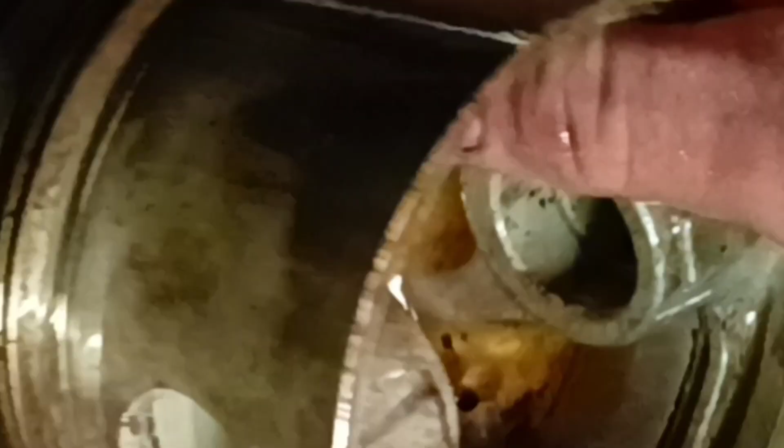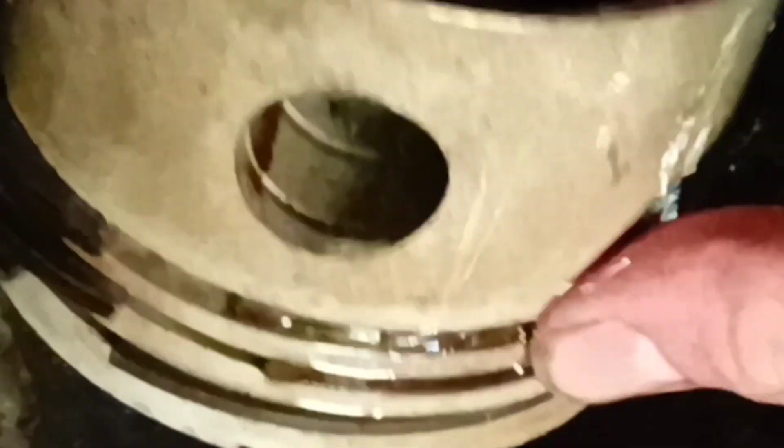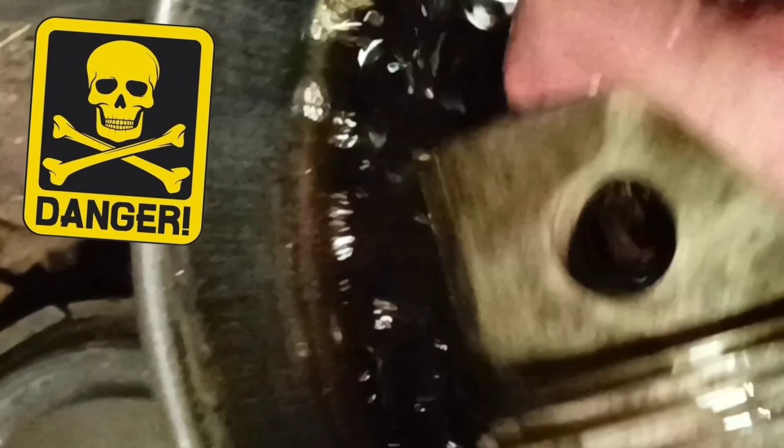I stored them at the bottom of this bucket with diesel fuel because these pistons were a little rusty when I bought them. Now we need to take out the pistons and check condition. Looks normal, I think, just superficial rust. Not any sense to store pistons in diesel fuel, but I bought them with a good discount, and these pistons had rust. Of course, diesel fuel is very dangerous for my skin. Pistons now look not so ugly.

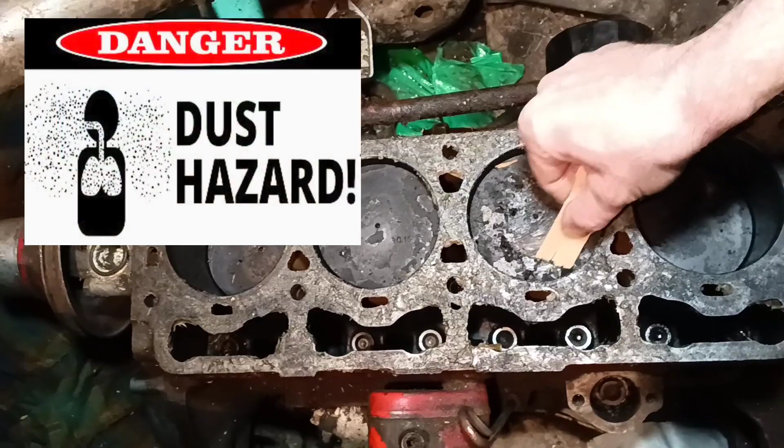Now let's look at the engine, clean it a little. Pistons very dirty, of course. This engine was rebuilt, we see oversized pistons, first repair. First repair pistons, you see a number on these pistons.

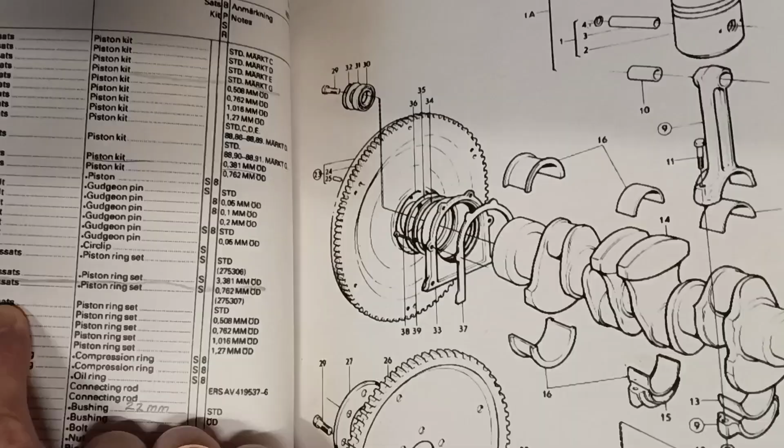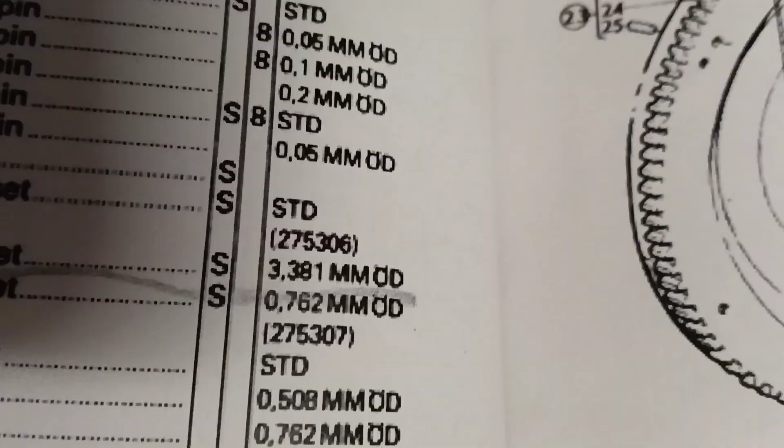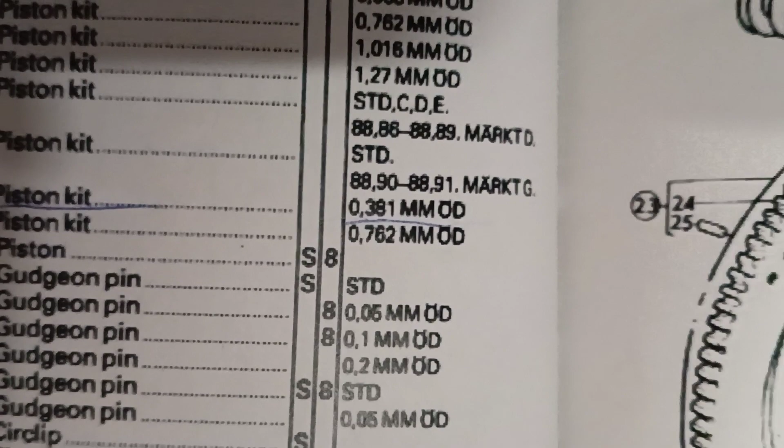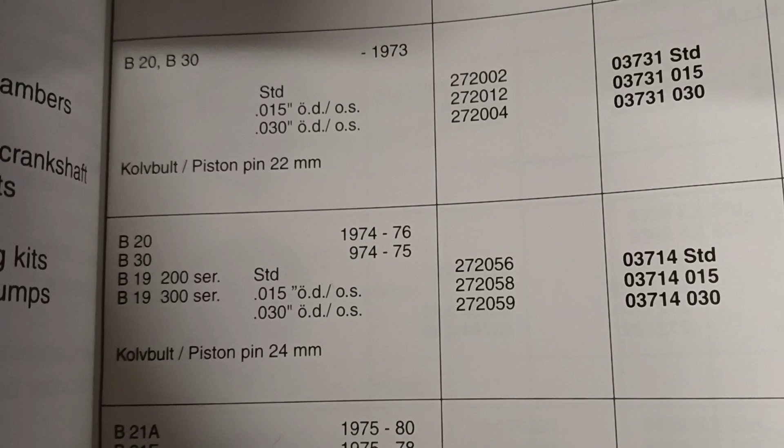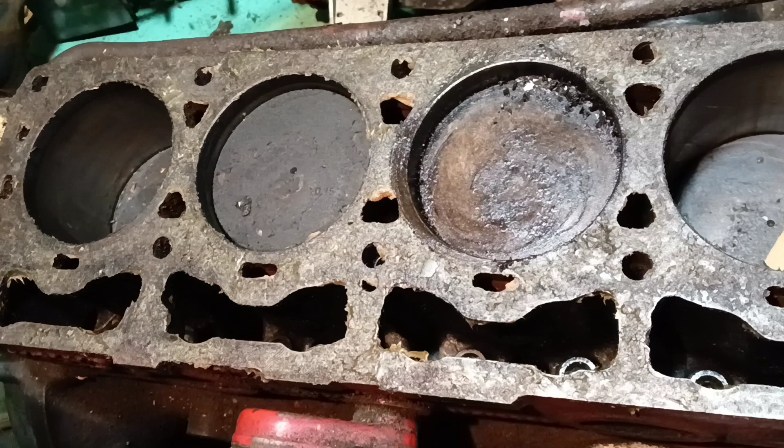Here in another catalog we see inch sizes, for earlier models that were in the Volvo Amazon and 140 series, and late models for the Volvo 240 series. Different pins because I bought oversized pistons for first repair, which can only be used for Volvo Amazon and Volvo 140 series, not for Volvo 240 series. Late models of the B20 engine had metric crankshaft sizes, which were used in the 240 series. It's no wonder the 240 series Volvo was metric.

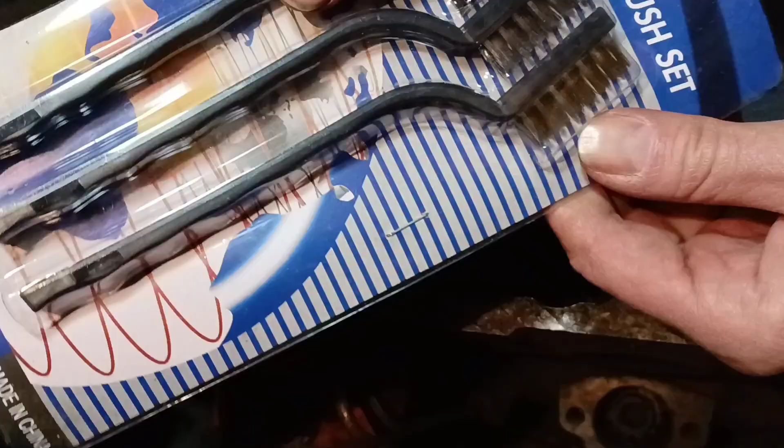I bought this brush set for cleaning pistons, three different brushes for cleaning. I bought this brush set online, but I have to say I bought them earlier also.

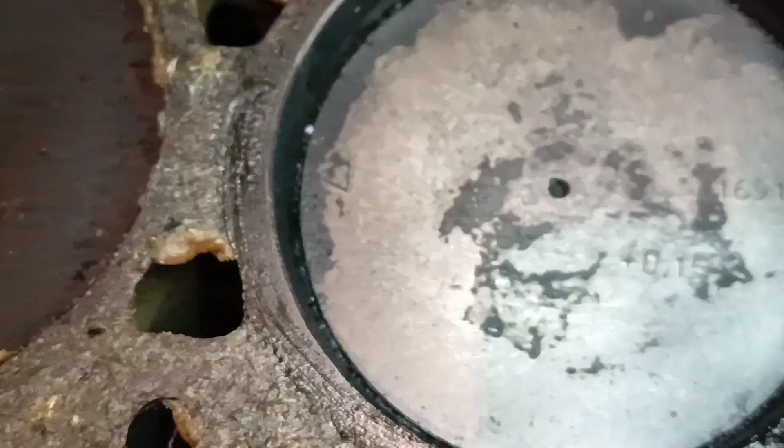When we cleaned this oversized piston, we can see the designation. I checked the valve head from this engine and each valve was leaking. I checked the valves with kerosene. Now we clearly see the designation. These oversized pistons can be used again when we make sure, of course, that they're in good condition. A lot of dirt, oil deposit, valve leaks - 100% that valve leaks.

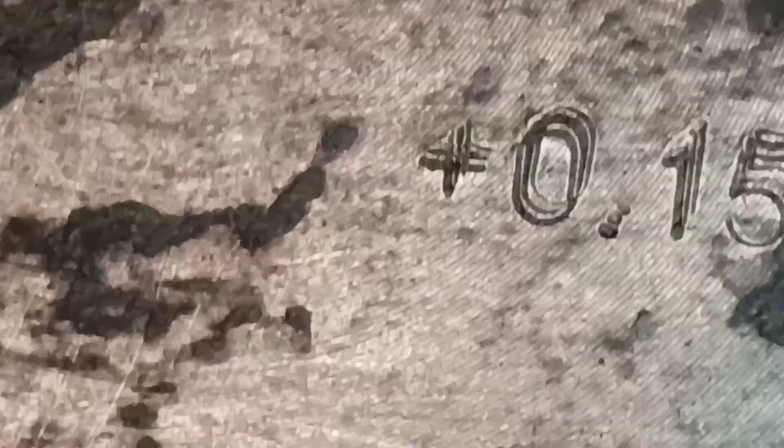Here we see oversized in millimeters. These pistons are for earlier B20. Here we see them without cleaning. Piston rings need to be changed anyway - when we repair the engine, we need to replace the rings. This same engine, the Volvo B20, was used in late Amazons.

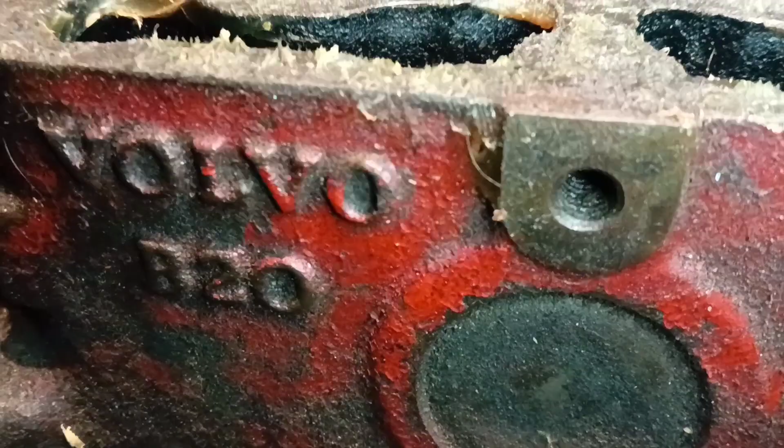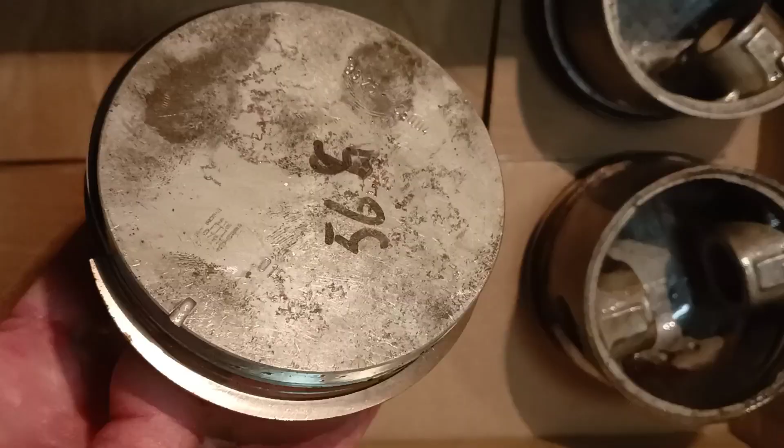Let's look at my pistons, which I bought with a good discount. They sat a lot of time, and we see rust, just superficial rust I hope, in the rings only. Should be washed from diesel fuel because I stored them in diesel fuel.

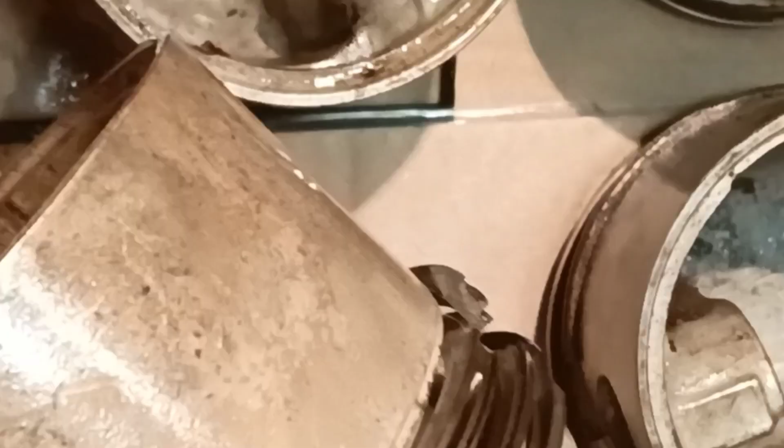So you're not taking as big a gamble as you might think, because I bought all stock pistons for my Volvo 140 series. And the pins are not so good, unfortunately. Cardboard boxes not so good looking, obviously the roof was leaking where they stored it. But as I said earlier, I bought them with a good discount.

I'm really pleasantly surprised by the high quality of these pistons. Maybe it sounds like an excuse, but I have to say that I now have a big wad of hundreds in my pocket. Just superficial rust.

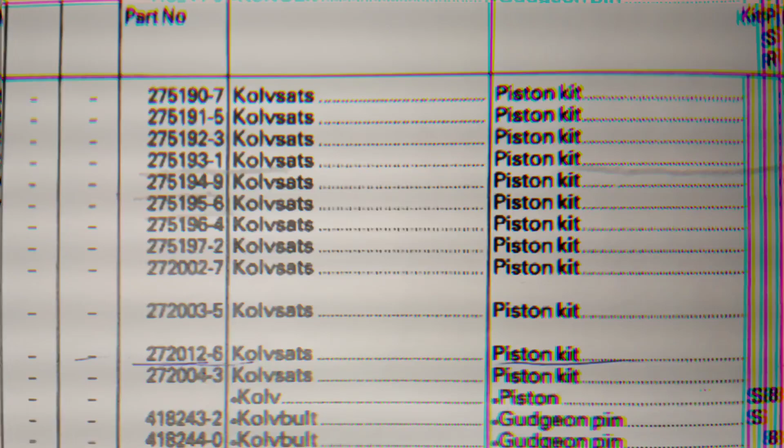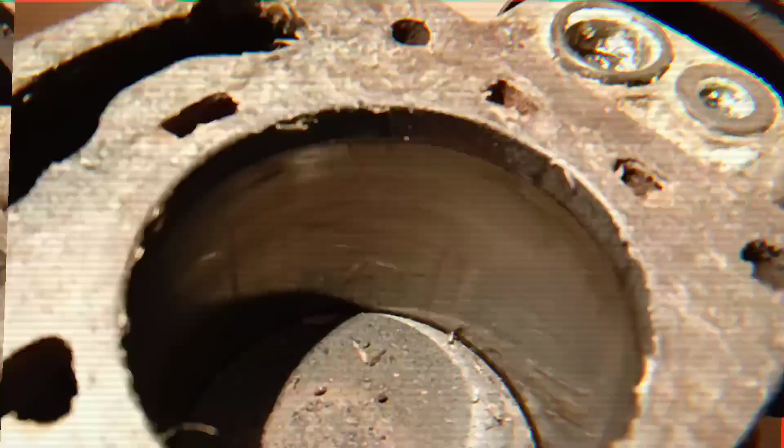Here we see standard diameter plus oversize, and we are able to get the size designated on the box. If we have an engine with 4 cylinders, we need 2 boxes. If we have a 6-cylinder engine, we need 3 boxes with pistons. These old ones are rock solid. These things are really well designed and built in Sweden. This Volvo B20 engine is actually done in Sweden, where they do it right.

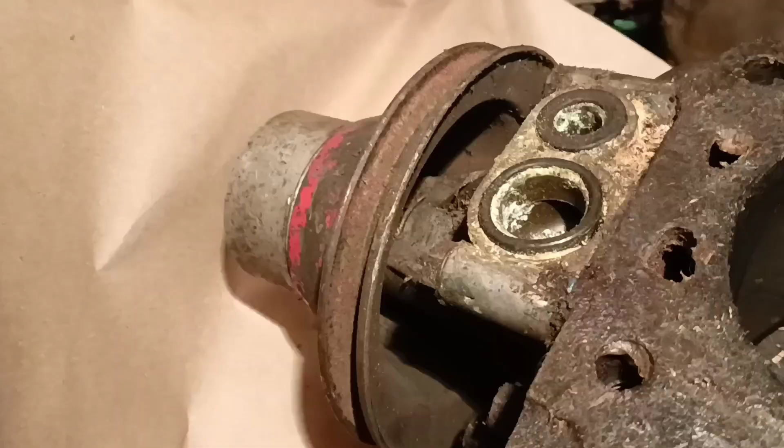I also recently bought engine heads, and they also need to be cleaned. Here the inlet valve diameter is 44. We know that the valve diameters differ on the Volvo B20 engines. Valve stem seals can be interchangeable from a lot of different models.

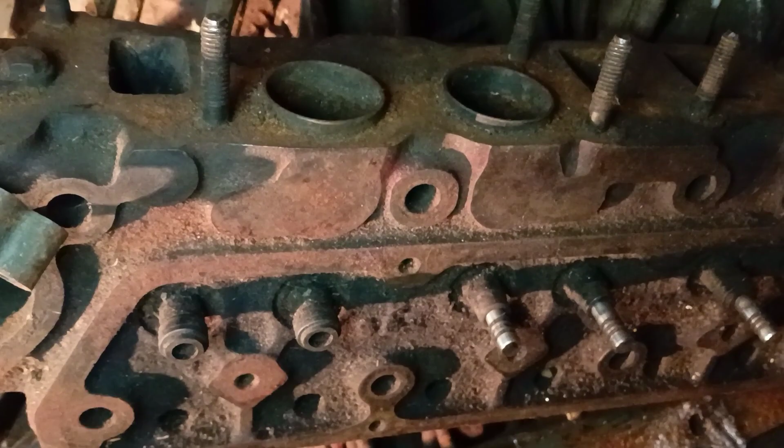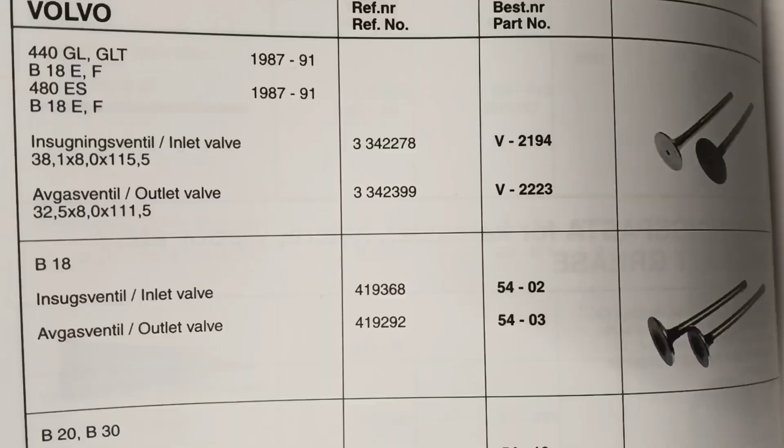And on the valve stem we can see its original number. If we look closely enough, we see 419766. What does it mean? Let's look at the catalog and see what this valve number means. This means Volvo B20 engine, 44 millimeter inlet valve. What's interesting is we can use this valve from the 6-cylinder engine.

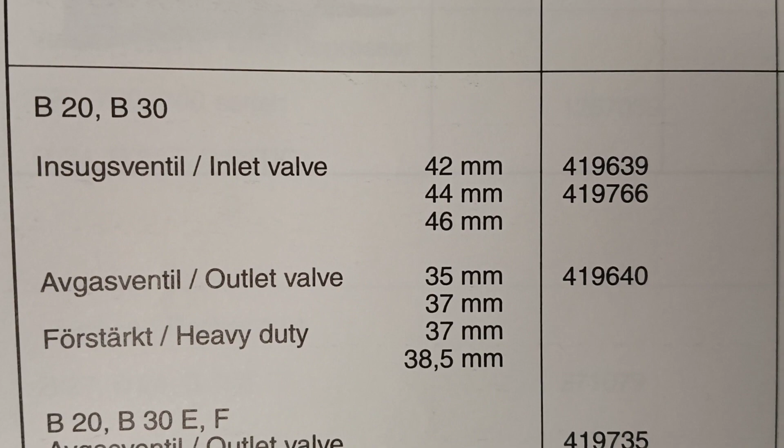B18 numbers, and valve stem seals also need to be replaced. Valve seats are not so damaged. This head is without valve seats that can break and fall, which I find amazing nowadays considering unleaded modern gasoline. But I use additives for fuel, and there are more substitutes now on the internet.

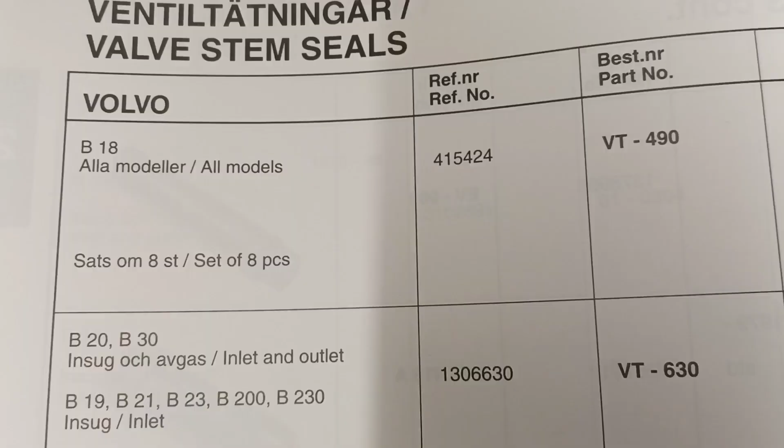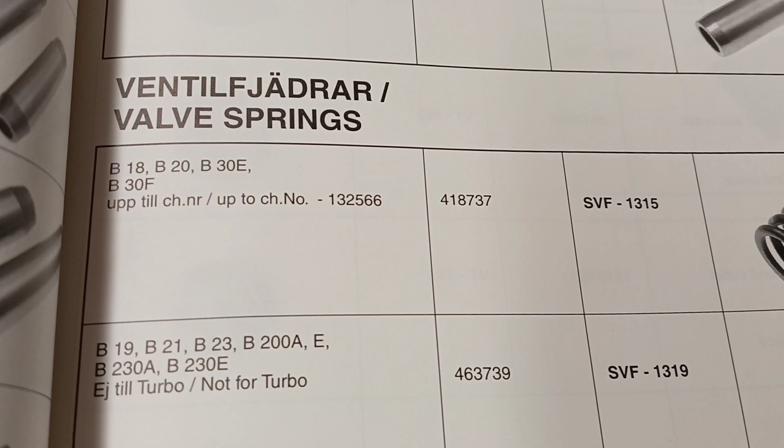Valve stem seals, also a lot of substitutes for the B20 engine. Valve keeper is interchangeable from another car. Valve springs maybe not for replacing. Valve guides. Here is an adapter for the oil pressure sender - through a copper pipe, oil pressure goes to the oil pressure gauge.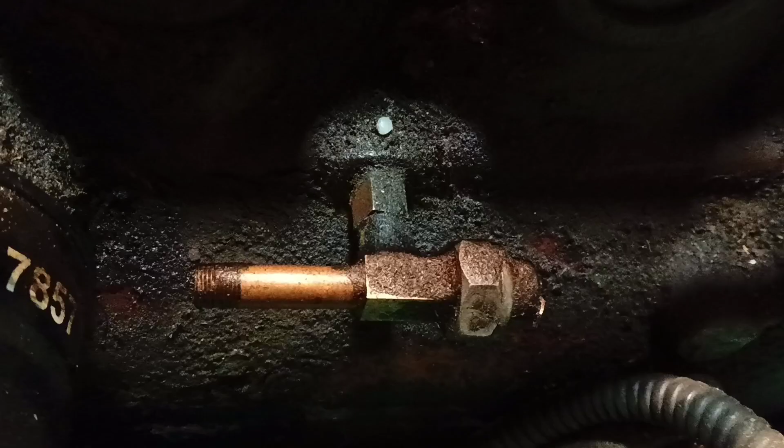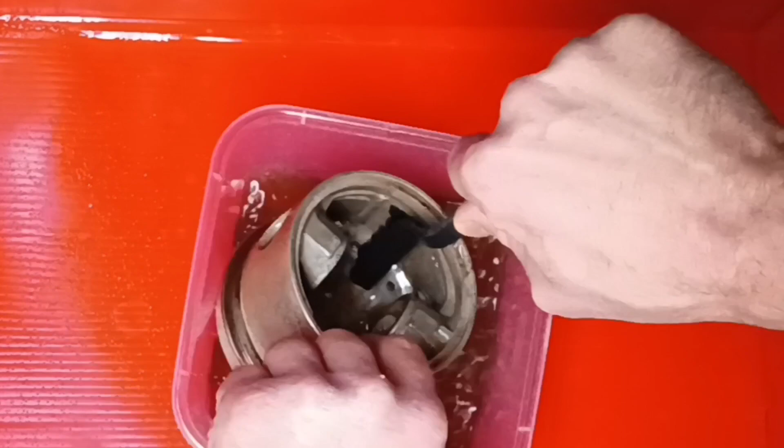And I need to clean the pistons again in gasoline now. MAHLE KOLBEN use high quality piston rings - they don't burn oil no matter what mileage they have on, if you take care of them of course. But crappy piston rings have low tension, and the piston rings have such little pressure pushing out that they don't seal right, and sometimes the engine burns oil. Clean slots in the oil rings let oil return to the sump.

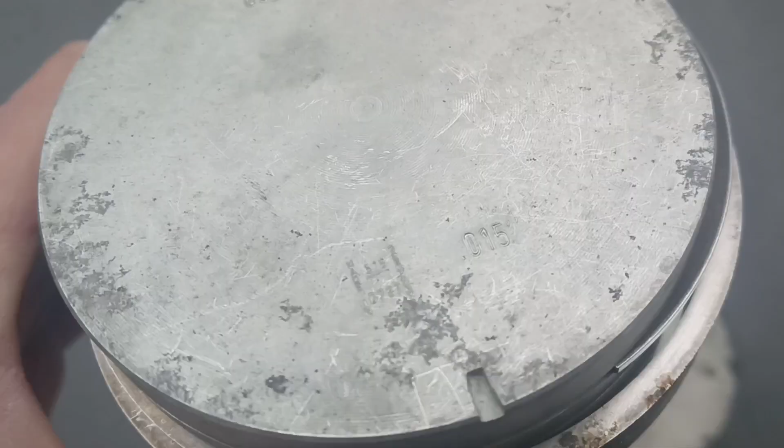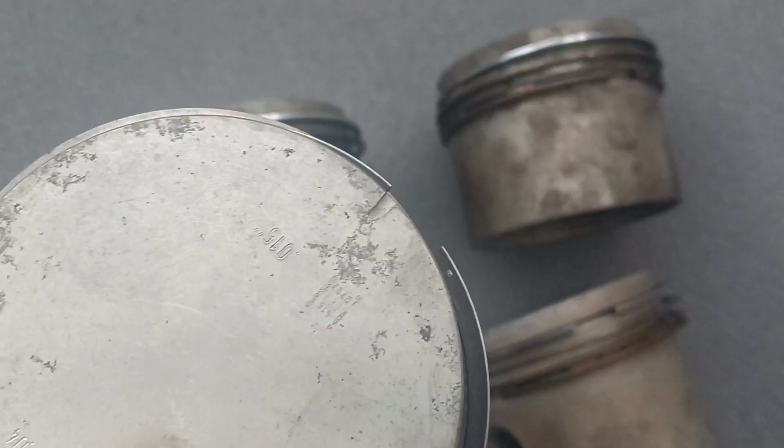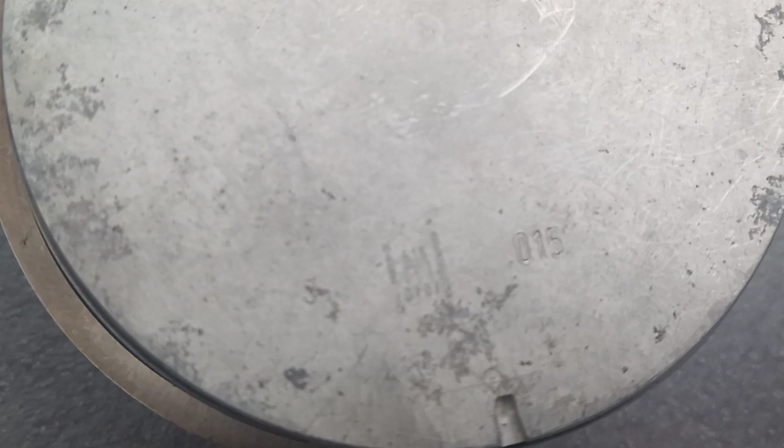Let's look at the condition of our pistons. That is just insanity how well made these pistons are - this is almost perfect. The slot in the piston faces forward. And if we look closely enough, we can see a lot of evidence that these are original pistons, made in Germany of course.

I'd say stick to these original parts if you're going to look at engine parts. Just superficial rust - anyway, old stock will be better than modern fakes.

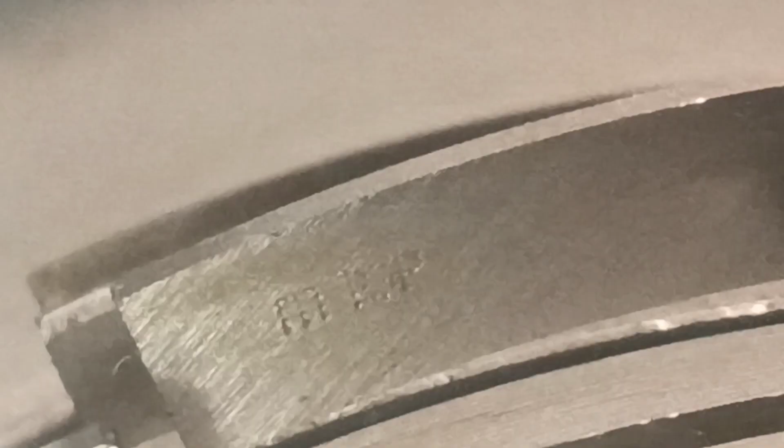We see letter M, this means top. On the second ring we see M, top, not a dot but letter M. But if we find a dot, this also means top. These are original MAHLE rings, and we see letter M, this means MAHLE, MAHLE KOLBEN. The oil ring we also see letter M.

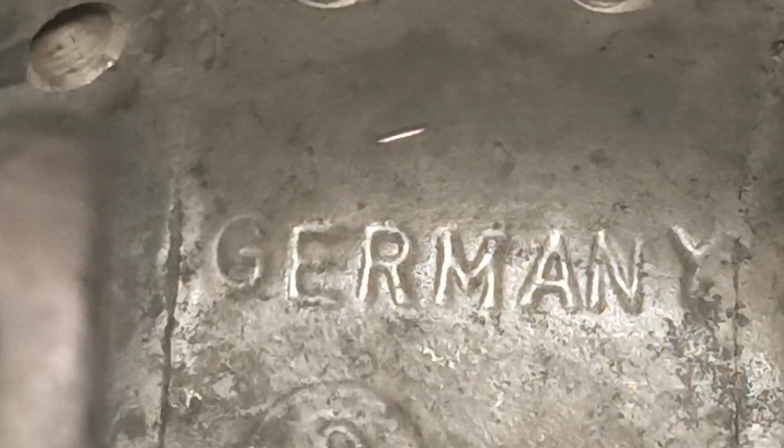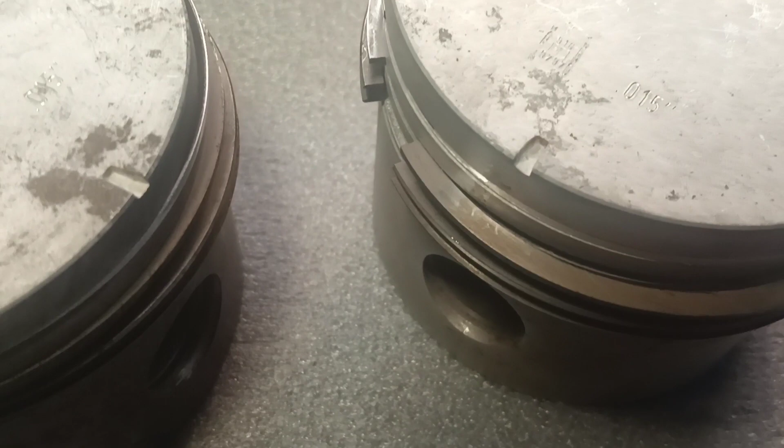Use original equipment on important parts, especially engine parts, like these oversized pistons for Volvo B20. We can put aftermarket parts on if it's really prohibitive, but on the internet and in modern books you can find tons of conflicting information about pistons.